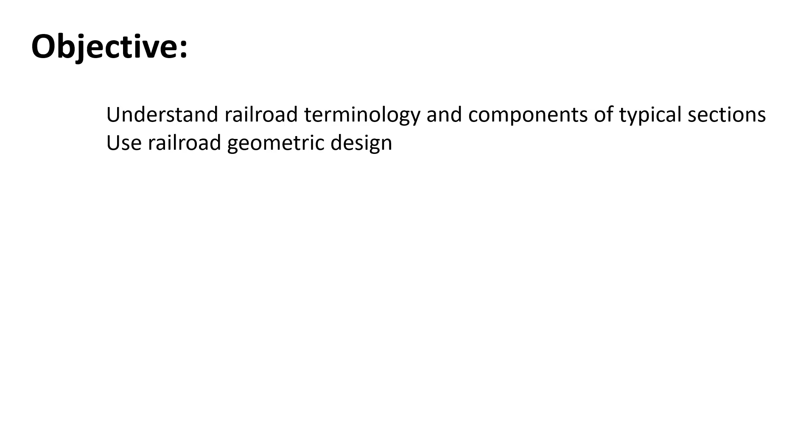So today we're going to talk about railroad terminology and what some of the components are of that. We've already gone through roads, right, and looked at how roads are built, and we've talked about drainage, we've talked about the pavements, and we've talked somewhat about the vehicles and what we can expect for turning. We've talked about the geometric design pieces of that, right? So we're going to try to relate that now and switch to railroads and kind of a short talk about the railroad piece of it.

And exactly similar components, right? It is a railroad, and so it does share a lot of things with roads that we've already learned, and we're just going to adapt it and basically highlight what's different when you're looking at a railroad versus a highway.

The first thing is highways are owned by the public. I guess there's some privately owned roads. There's very few, but there's some privately owned ones. All of the major roads, all the kind that we've been looking at, really are public roads. And that's the huge difference, is that there are very few publicly owned railroads in the United States. That is just not the way it was done here, right? It didn't start that way, and it's still not that way.

And a lot of other countries have nationalized their railroads, or they started nationalized, right? So some of our friends from China, their railroads are all nationalized. They're owned by the government. And so they can easily make a decision about how they're going to run their railroads and what kind of equipment and stuff they're going to use. Here, our railroads are privately owned, right?

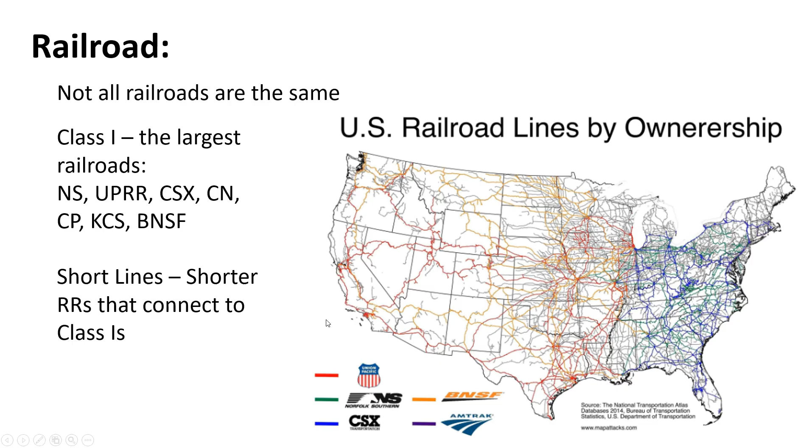So federal railroad inspectors will come out and inspect the rail lines, but they're owned by these railroads, and their standards are set by those railroads. If you get hired and work for a railroad, you can find it online, or they'll send you what their design standards are. We used to do some work with Norfolk Southern, so they sent us their design standards.

They're not a lot different, but there's some definite differences you'll notice between the different railroads, how they like to do things, right? It's their preference. We also did some work for the South Shore line, which is a commuter passenger rail line, but also hauls freight. The South Shore has very specific standards based off of the size of their passenger cars. I think it's 80 or 88 feet long passenger cars, which is a little bit odd versus what other passenger railroads use.

So for curves and so forth, you've got to make sure their type of railroad car can go around those curves fine. And they're electrified, which is an unusual thing in the U.S. The Northeast corridor is electrified, and that's really it in the U.S., and the South Shore. There used to be Illinois Central commuter lines and Metra; some of those are electrified coming out of Chicago, right?

Those are shorter ones. There used to be one of the northern transcontinentals, the Milwaukee Road, electrified all the way to the West Coast across the northern tier of the U.S. But they abandoned all that in the 1980s. That road doesn't even exist anymore; they pulled up the track and everything. That was probably the only long distance electrified rail line in the U.S. So it's kind of weird compared to the rest of the world. So everybody's got their own standards.

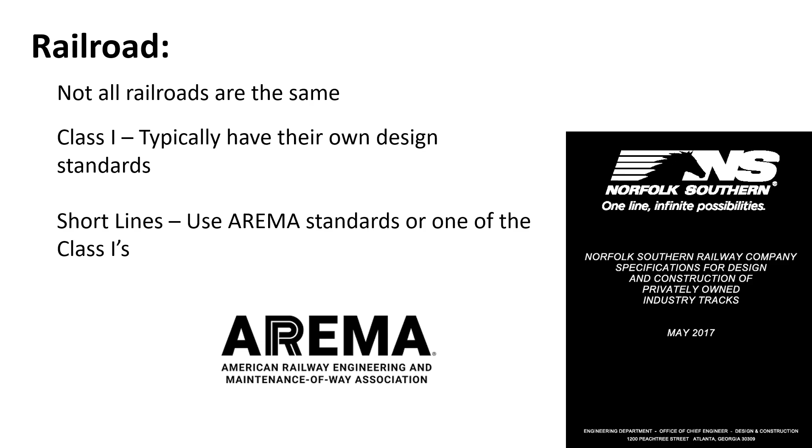So that's just to give you a rough idea. This AREMA manual is kind of like the Green Book, but it's even less stringent than the Green Book is for highway work, because what really counts is the individual railroad specifications from each company. If you get hired by a railroad company, they'll send you their specs, and you'll follow them.

Right? How deep is my road, which is based off of how heavy are my vehicles and how much traffic do I expect. The railroad rail is set up the same way, but they list it by weight per unit distance, right? I think it's per yard. So a stronger rail would have a higher number, right? So it used to be they were using 80-pound rail or something pretty light, and then 115-pound rail came in, and then as the rail cars and the locomotives got heavier, they would use heavier and heavier rail, right?

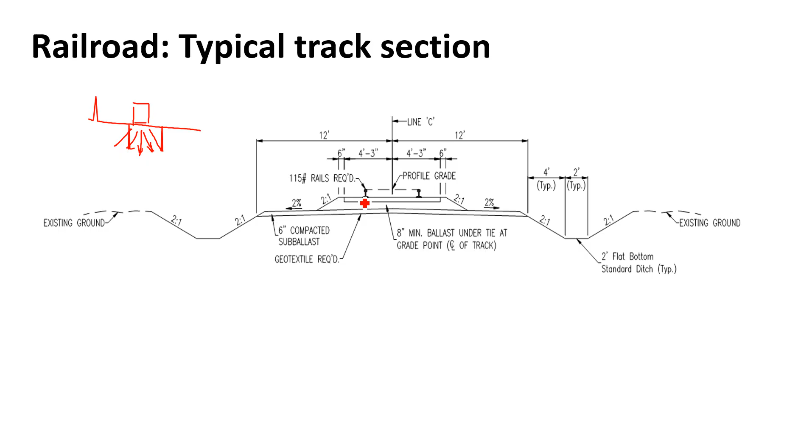We're distributing this load. It goes into the sleeper. This whole sleeper will move, right? This whole tie is going to move with the rail. And so it is all transferring load out. It bends a little too. You'll see that as a heavy train goes by. But that's transferring the load. So that goes through the ballast. And we slope this out to keep it stable, but also it helps with that transfer of load going through the ballast.

Now the ballast is roughly a 2-inch top size aggregate, and it's fairly clean. Well, they want it to be clean, and it usually stays clean for a while at least. It has a lot of voids in it, and so unlike highways, where we have to worry about how to get the water off of the highway, right? Or is it going over here to the ditch? That thing drives me nuts when it does that.

In a railroad, it's pretty cool, right? The water goes right down through the aggregate, right? It's super well drained. It is really well drained. Now, when it hits this layer down here, we were building a brand new railroad bed, and so we had this.

We can get some of this compacted subballast, and we slope it so that if the water comes through the main ballast, it'll follow this out and hit our ditch, right, and come through. Just like before, we don't really want this saturated. Well, we definitely don't want all the subgrade saturated. So if we can move the water to the side, we will, right?

And so we'll slope the subgrade, have a slope on it until it drains into the ditch. But when rain falls right above the railroad tracks, it's just going to go right through that ballast until it hits that sloped subgrade and hopefully follow it off to the edge, to the side.

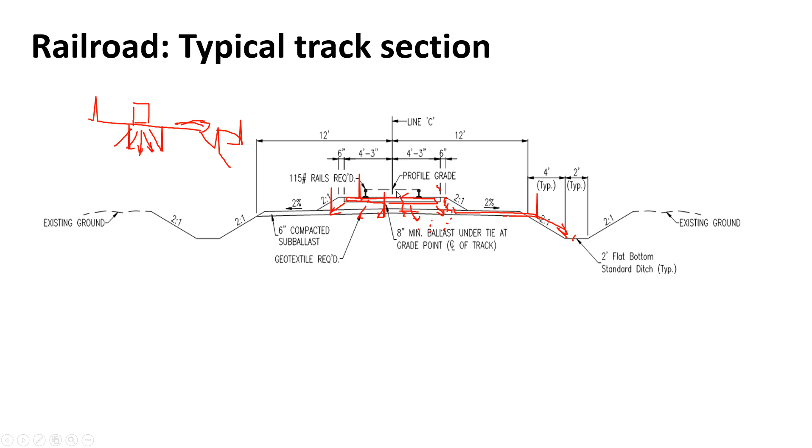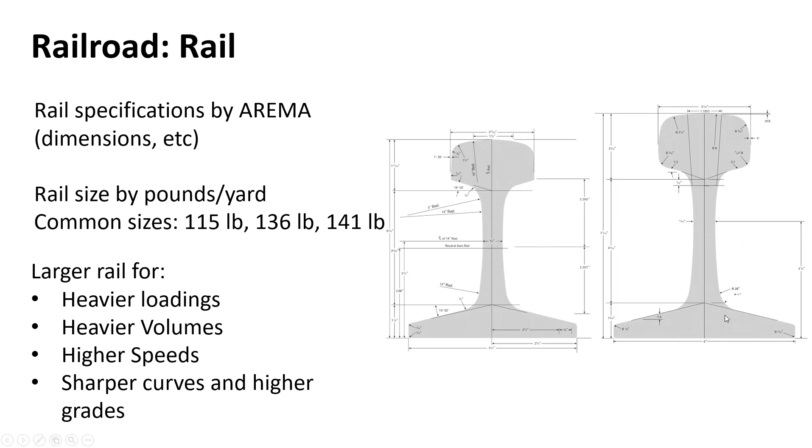But you can see if you use a different size of rail, now my profile grade lines up with this line versus down here. So sometimes if you replace the rail, you actually change your profile a little bit, right? You're actually putting a deeper pavement in. That's what you're doing effectively. So that's rail.

And there's different materials, right? So we've got standard, medium carbon rail. You can harden the head on the rail, and we'll talk about that here in a second. And there's fully heat treated, which is a heavily resistant one and even stiffer, right? So you're changing the Young's modulus, or the elastic modulus of the steel through that.

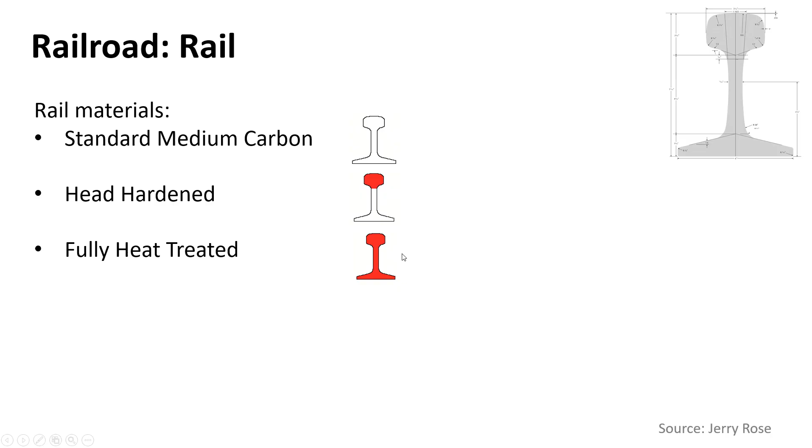And this is what it looks like. This is how you know what rail you've got. So this is a 133-pound rail. It meets the AREMA specifications, RE. It's head hardened, so only the head of the rail is hardened. It was vacuum treated. It was made by NKK, and this is when it was built, in 1996 in March.

So you can walk up to rail and you can check it, and you know exactly what you've got, and that is handy. It would be nice if our pavement, if you walked up to it, had it stamped on it: 6 inches thick, 1.5 inches of surface and 3 inches of intermediate. That would be nice instead of having to get out a core drill every time you want to know what pavement you've got.

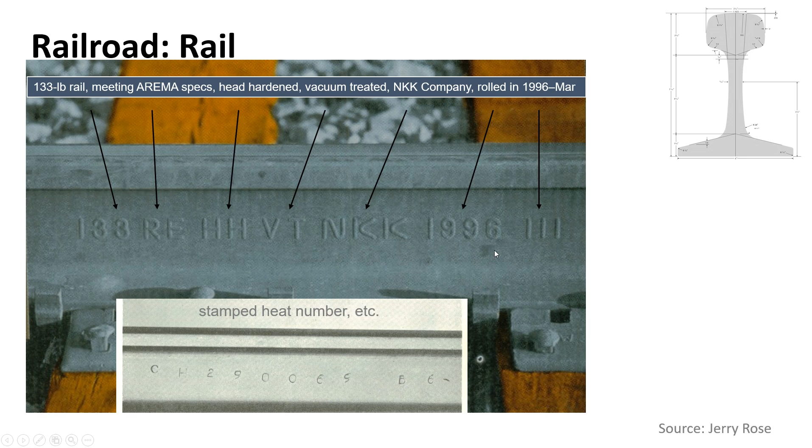You just walk up to this and you know that's 133 and I know it's head hardened, and okay, off you go. And here's the stamped heat number on it. So you can even back check that if you wanted to. All right, so that's rail.

There's these 3 hardnesses, right? So you've got the standard. So this is our Brinell hardness. I don't know if you guys covered that in materials class back when you were sophomores, but the higher the number, the harder the rail is. And so you can get up into a higher class rail. So obviously a heavier rail, a harder rail, fully heat treated rail is the better stuff, right?

That's going to be the stuff if you've got a really busy active rail line with a lot of heavy weights, then you're going to want that, right? Well, how much does a rail car weigh? That's a good question, right? We're talking about making a stronger rail for that. What's the load on a car? All right, so our standard load right now is

for free interchange, which means you can move your freight cars on and off pretty much any freight rail line in North America. The free interchange weight of a rail car is 263,000 pounds, right? The class 1s are running 286,000 pounds. Why so heavy? Because you can make more money if you can have a single car that holds more stuff, right? So that's why. So that's this 286,000 one.

That's the standard one. A lot of times, if you're parked near the tracks when a train goes by in Valpo, you can read right on the side. They paint it on the side of the cars in little white letters what the gross weight is, and you're going to see a bunch right around the 286,000 pound line. And that's why this is our standard load. The class 1s just got together and decided, yeah, that's good.

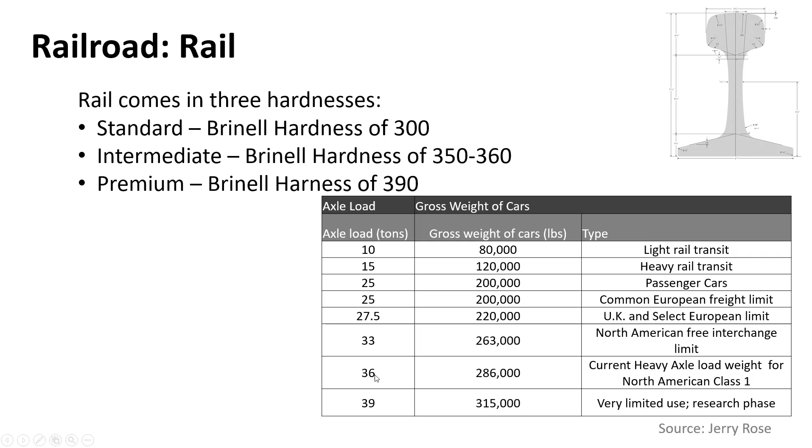Well, what the hardness comes down to is here's a wheel, a car wheel on a railroad on the rail, right? And they are that shape, right? So it's conical shaped through here, but let's say it's a circle. And where it intersects with the rail, it's a small area. It's like a half square inch, right? So you're getting 36 tons on an axle. So that'd be 18 tons on each side, each wheel. 18 tons is on an area that's a half square inch, right?

That is why this has become the limit, because that much pressure even on steel will deform the rail eventually, and that's why they do hardening on the rail head, so that when the train's rolling, it's not a problem, but when it stops, all that weight sitting there for a long time will deform the top of the rail, and you have to come by and reprofile the tops of these rails at times because they get too bumpy from that traffic. And that's what's really limiting rail cars getting any heavier than they are.

I guess you could add axles to it and something like that. Locomotives have 6 axles usually now. I guess rail cars could go from 4 to 3 on each end, go 6. So that's why hardness is important on the rail, and it's because of this, right? We have such a small contact area, and that 286,000 pounds is pretty much at the limit of what can economically be built and maintained right now.

This is what it looks like a little bit from the side. There's an inside flange, obviously, on the rail car wheels. I think you probably knew that. If this is built right and it's straight and true, this wheel on your car is actually a little bit conical, right? It's not flat straight across. It's got a little bit of a slant to it, and if everything's right, if this gauge is exactly right and everything's built well, this flange will never touch the rail. Right? It's just there as a protection, as backup.

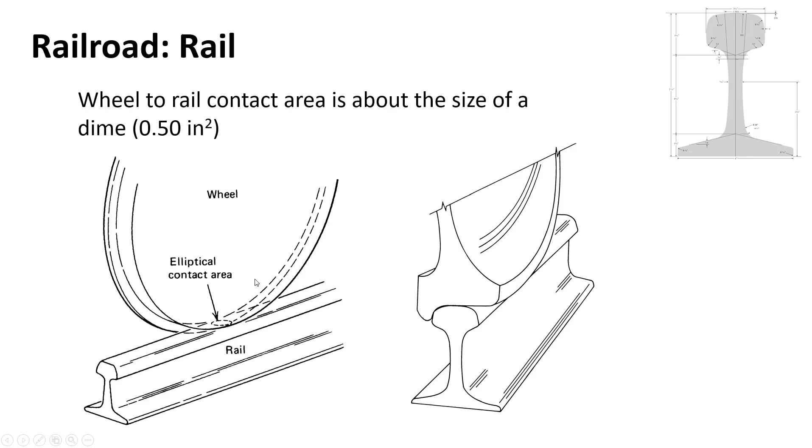When a wheel goes across that, that's going to create a dynamic force. You get 286,000 pounds on that thing. Well, not on each wheel, but on the whole rail car. And it click-clacks across that joint, right? That puts a little bit of dynamic force on it. And that's not good, right? Because you repeat that. How many cars are on a train these days, right? It's usually over 100, and you got 4 wheels per car, and then you've got 100 and some trains a day going by. And super heavyweights.

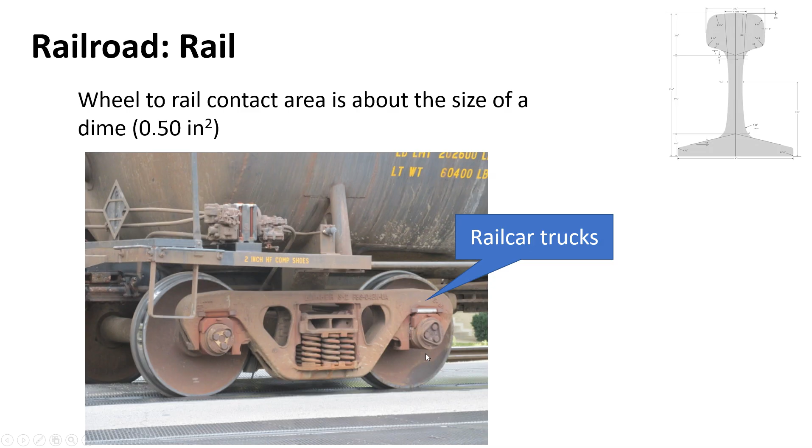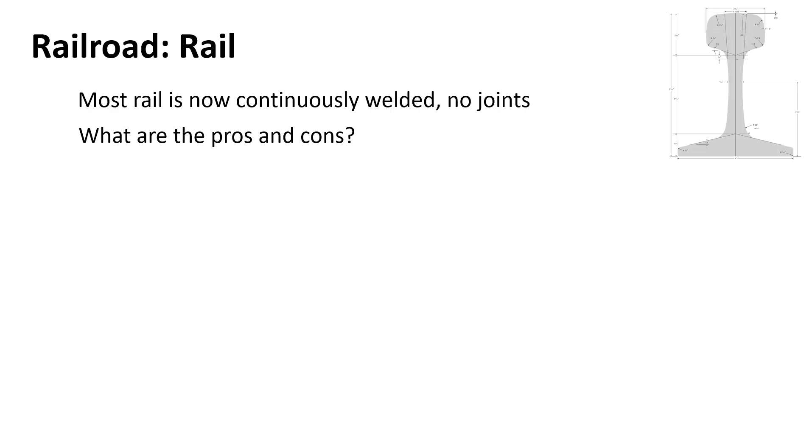So that wasn't good. So that's one of the big pluses of continuously welded: you don't have that little joint, which is a point of weakness. It'll develop more weakness if you keep continuously loading it like that. All right. So that's one of them. And there's none of that bump and that dynamic stress, right? So the con is that there's no expansion joints, right? When you continuously weld this rail, it is continuously welded for miles, right? A number of miles before they'd have another joint, an isolation joint even.

And how do you fix that, right? If you were designing this, you're a materials expert. How are you going to keep this from buckling, right? There's 2 things. One, you brace it with the sleepers, the ties. The other one is that when you weld this rail, you put tension in it. And so they'll list a neutral temperature for this rail, which is when there would be no tension in the rail and no compression in the rail. And that neutral temperature is usually set in the upper 90s to 100 degrees or something, right? That's where they want the neutral temperature to be.

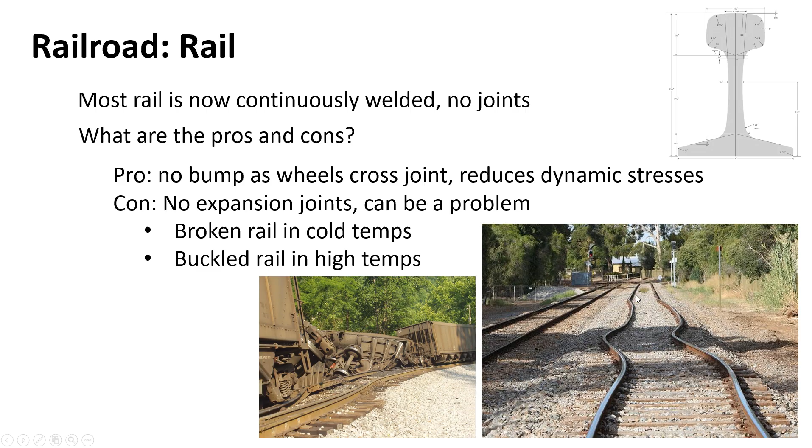They've worked out most of the kinks in the process, and so this is what Class 1s particularly are always using now, continuously welded rail. And it's pretty cool to watch them do it. They use like a magnesium welding system right there on the track, and it's really bright and smoke flying and everything. It looks like, are they setting the track on fire? Well, they really are. They are welding it right in place.

So the other way we keep it from buckling is we secure the rail, and that is with these plates, which tag into the sleeper. And if this was a concrete tie, we would be using what they call a Pandrol clip or some kind of a clip, which would have like an anchor bolt inside the concrete tie that this would come out of and attach to. Well, in wood ones we just use a spike. So here's our spikes, right through there.

It's called a tie plate. This is a railroad tie. This is a tie plate. Here's the rail. This is from the side view. This is from the top view, right? And you can see we've got a bolt over here, right? And then this one is actually lipped over the flange plate on the rail, right through there. So we pound these in.

Some of these actually overhang, like you can see that one. This one's actually just securing the plate to the tie. This one also helps do that. And this one you can see has been moving. Look at that. When the train goes by, this one has been wiggling, and we don't like that, which means this tie is pretty old. Look how beat up it is.

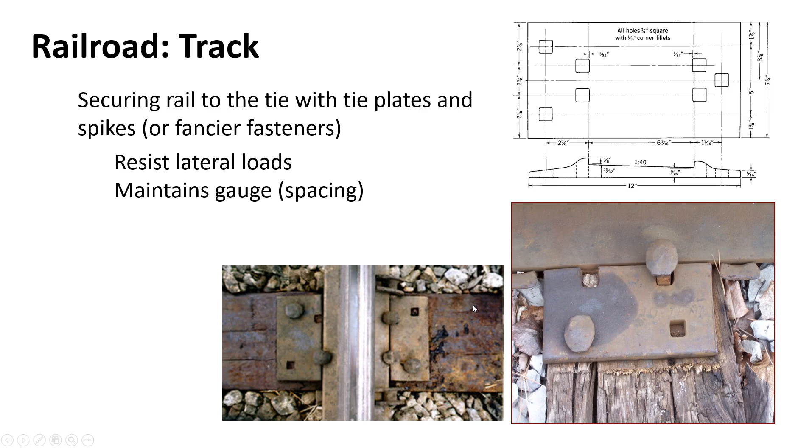The other thing is as these holes wear out or get enlarged, we can move a spike over here and continue using that tie and keep it in service a little bit longer. So these are spare holes we can move our spikes over to. And this is an example, again from Norfolk Southern. This is how they like to do their ties. They have their own standard for this.

If you're on a straight tangent, you just need 2 spikes in that tie plate. If you've got a 2-degree curve and over, now you're using 3 spikes, 2 on the inside, 1 on the out. If you've got a sharper curve, and we'll talk about curve degrees later, now you're using 4 spikes and sticking some on the far sides. And if you've got a really sharp curve, 13, now you're using 5 spikes. So the tie plate is kind of universal, and we just stick in as many spikes as we need. On a straight track tangent, 2 spikes is enough on each tie plate.

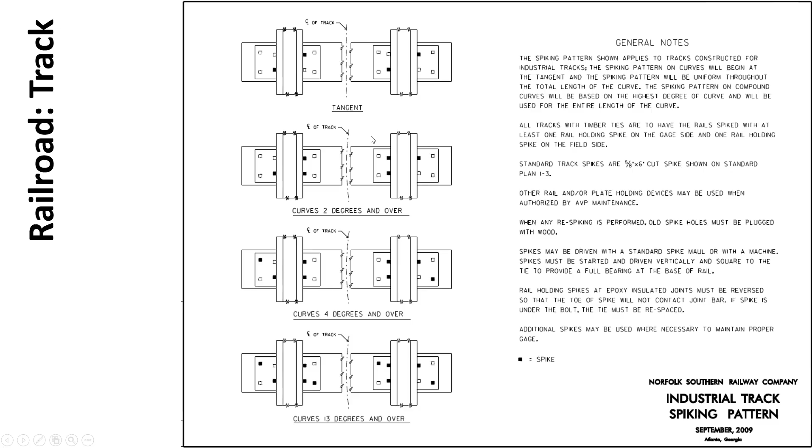Yeah, kind of interesting, right? So I guess the difference is the lateral force. I'm going to answer my own question. It's the lateral forces, right? As this degree of curve goes up, you're getting more shoving, pushing to one side or the other, so you're using more spikes for that.

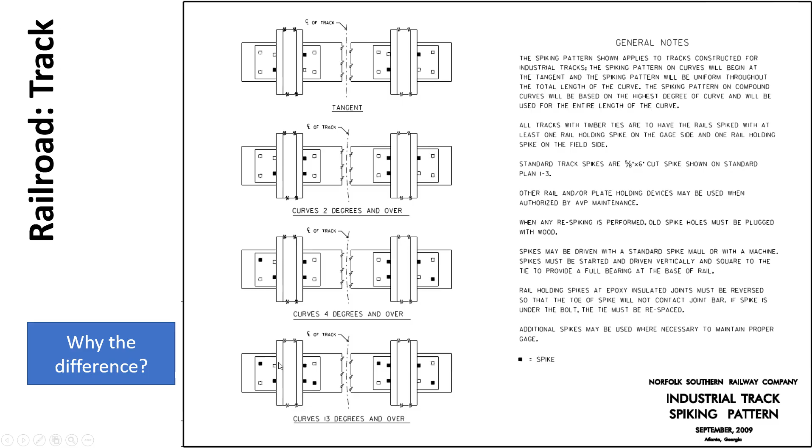So we'll end there this time. Next time we'll pick up and talk more about track in railroads.